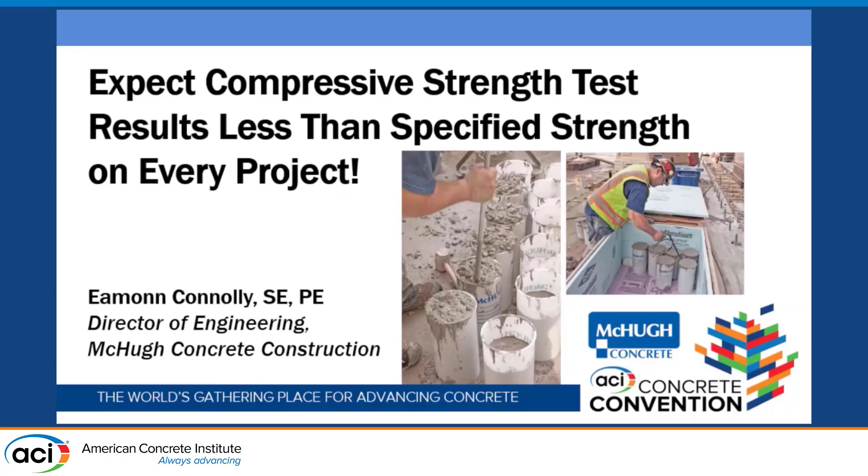What I'm talking about today is something I was privileged to collaborate on with Bruce, Colin and Jim, regarding compressive strength tests and expecting low breaks. So I'll just quickly go over this. Basic introduction: the question that comes up is, is it normal for a strength test to be less than f'c, and how often?

Per ACI 318 26.12.3.1, it's acceptable if the average of 3 consecutive tests equals or exceeds f'c, and each individual test is not less than f'c minus 500 psi, or, if the strength is greater than 5,000 psi, within 10%.

Those are the rules, but the expectation in the field is that if there's a low break, the alarm bells are ringing, the red lights are blinking, we're all in crisis mode, and the owner et cetera think the work is suspect and needs to be ripped out. And that's not true. This paper that we collaborated on is trying to point this out.

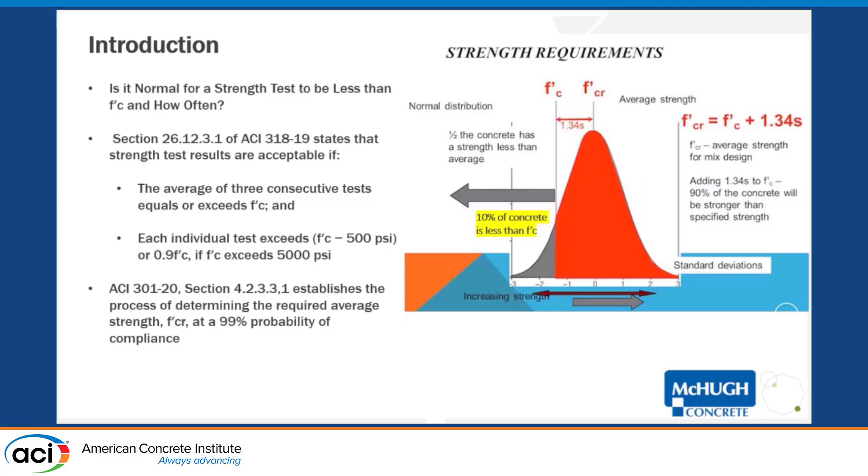In terms of designing a mix, the ready mix partner is targeting an average strength, basically defined as the target f'c plus 1.34 standard deviations. With this approach, 90% of all tests should exceed f'c, but that also means 10% would be less. So therefore, you would expect to get low breaks.

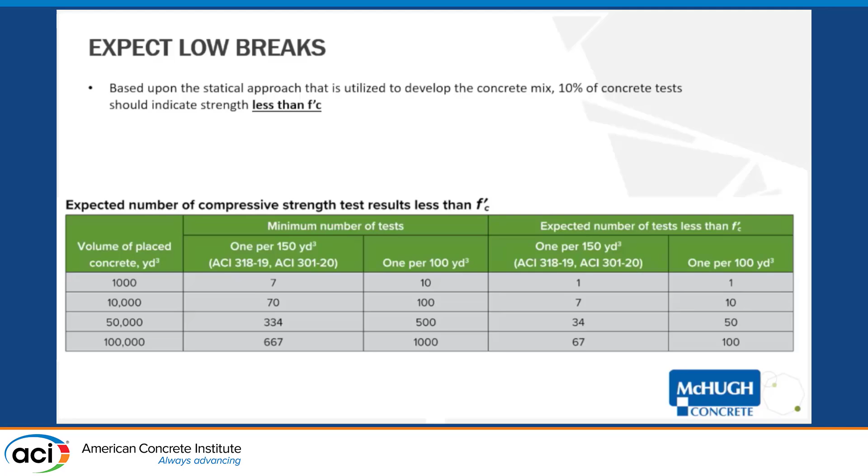For the small job, say you're doing 1 test per 150 cubic yards, you're definitely going to get one low break, again assuming the mix was designed using statistically probable methods. And if you've got a big job, 100,000 yards, you're going to get 67 low breaks. So this causes headaches, and no one wants headaches.

The ready mix suppliers, and Colin can speak to this, are some of the most screamed at people in the construction industry. There's a lot they're asked, and if things aren't going right, there are lots of phone calls back and forth. So quite often, almost standard practice, the ready mix suppliers over design their mixes to avoid the screaming phone calls.

There are obviously other parameters that could be driving the mix design, in particular issues important to the contractor in terms of set time and high early strength. But a lot of it is also just to avoid headaches with testing, and avoid being the victim of another party testing their material and suffering the consequences.

There are real costs, and there are sustainability parts to this. For instance, the ready mix supplier, to avoid headaches, throws in an extra 50 pounds of cement per yard. If we say, hypothetically, this adds an extra $15 per yard, for a 100,000 cubic yard project that's $1.5 million. It's not small money. This is about managing expectations and avoiding headaches, with extra dollars that arguably shouldn't be there. And there's also the sustainability part of it.

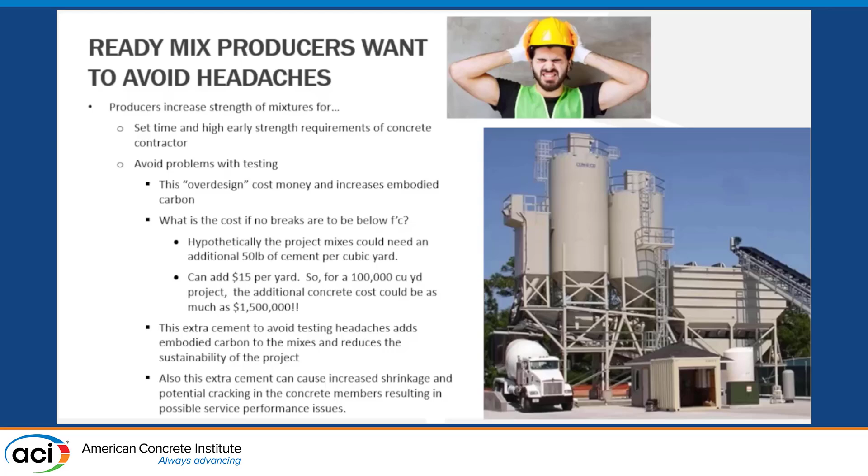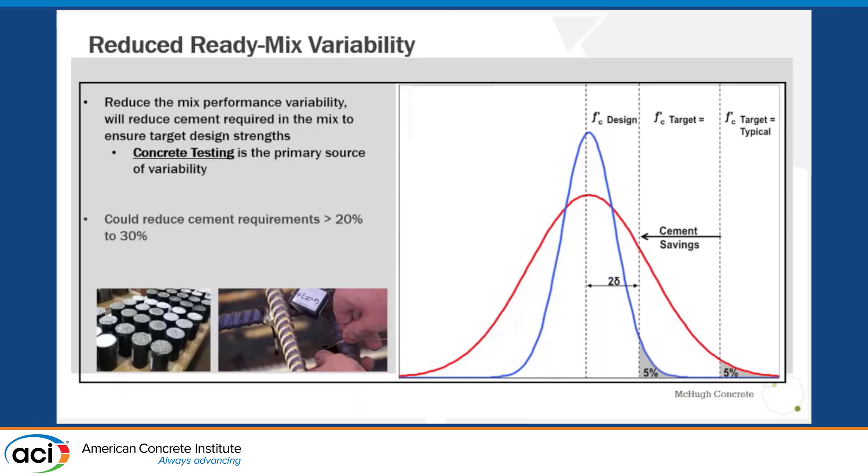And just furthering the point, the mixes are obviously shooting for a target, but the variability is coming in from the testing. If you have greater variability, you end up with this red bell curve here. So this over design results in additional cement requirements, with cost and sustainability consequences. So, testing troubles. There's a lot. There's a big long list here.

But fundamentally, it all really boils down to not strictly following the ASTM procedures. So there's a whole bunch of stuff that goes on from collecting the sample, to filling the molds, ensuring that you've got proper consolidation, ensuring that they're properly protected from the elements, and then there's the whole issue of handling and making sure that they're kept in a protected condition for that first day.

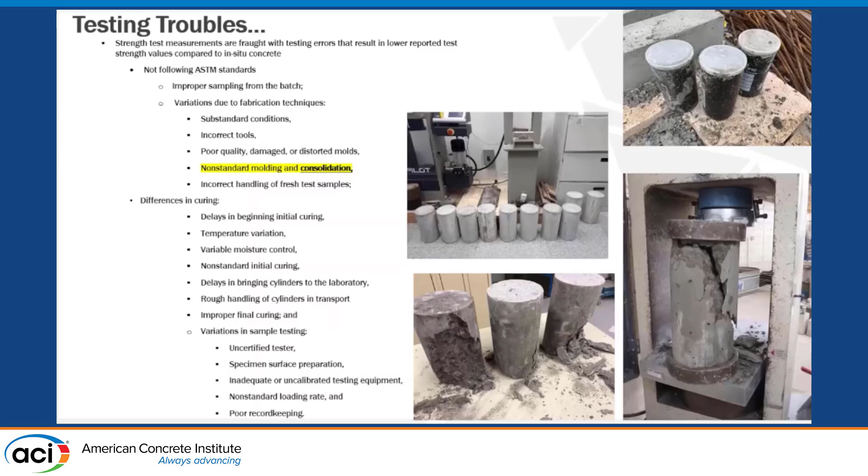Until they get picked up. They're being properly cured in the lab, and then they're properly prepared for testing in terms of grinding or capping, and then properly performing the test on calibrated equipment, et cetera. So again, there's a large number of things here, and we're all familiar with them. But all this stuff together can result in increased variability, and then we all deal with that.

And so I think perception and labeling matter, and the people who are in receipt of this report and are passing it around and discussing it are not necessarily the engineer of record or the informed contractor or the ready mix partner. So there's a wider alarm that arguably was excessive. So the language is important. It's also important to note that it's not the testing agency's role to say that this particular mix and placement was rejected. Their role is to perform their test to the ASTM standards and report the results.

Some testing agencies provide 7-day and 14-day breaks, and this was the case here. So we had 5 cylinders or specimens collected. We broke one at 7 days, one at 14 days, and then the balance at 28 days. Now the 7 and 14, that's interesting stuff. We had a 7,000 target, and we're at 5380 and 5570 at 7 and 14 days respectively. But we don't have any reserve cylinders afterwards, so we're now left in a pickle.

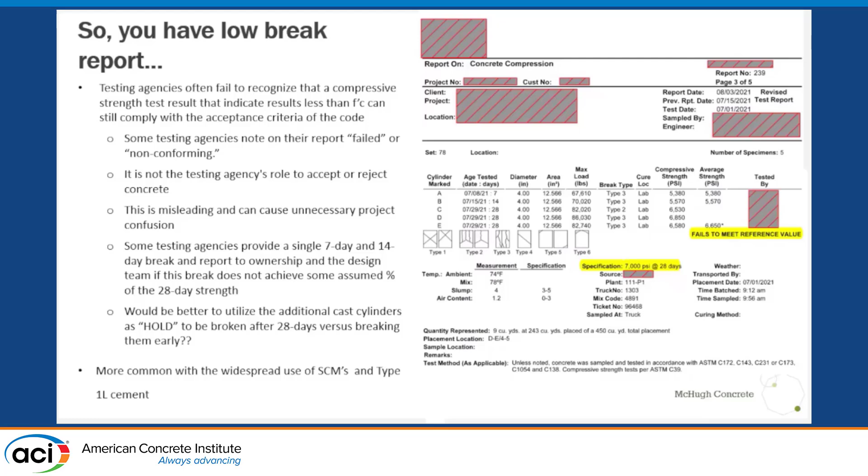And so allowing the acquisition of information to be utilized to help shape decision making, and letting the engineer of record use his or her experience or judgment to help assess whether the actual placed concrete is fit for purpose, or some other remedial measure might be required. And there's examining the testing, so looking at the test reports, any kind of information you can find out, as simple as the trucks, the frequency of trucks, the temperature, all that kind of stuff, to see what information can be gathered.

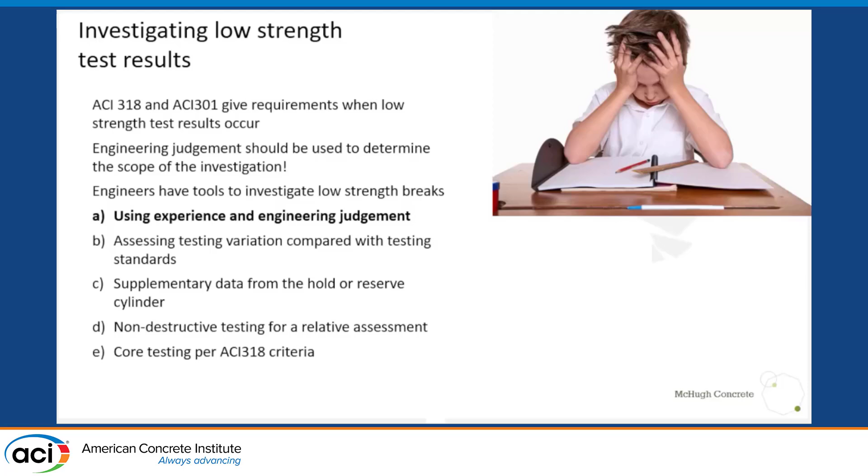Ideally getting data from the hold or reserve cylinders, which would have been taken at the same time from the same batch, same truck, and would have been really helpful to understand the results we're looking at, and then non-destructive testing for a relative assessment, and then last but not least, the worst case scenario, coring.

So engineering judgment. Like I said, it is an important concept, and it's a concept that ACI strongly advocates. The word judgment appears frequently throughout the document, 16 times in 318.

And one of the more important places in that document where it uses the term judgment is in the opening chapter, where it says the code and commentary cannot replace sound engineering knowledge, experience, and judgment. So again, the document empowers engineers to use their experience and their ability to gather information to form a judgment. And this triangle here shows you the sort of things that the engineer should be thinking about in terms of safety, functionality, and cost, as they formulate an opinion and say whether we have an issue or some sort of remediation or mitigating measures

need to be taken. It is, again, the role of the engineer of record to allow acceptance of f'c lower than specified. If, by their review of their analysis, they find a lower value acceptable based upon the reported test values, it's absolutely within their role as EOR to accept that material.

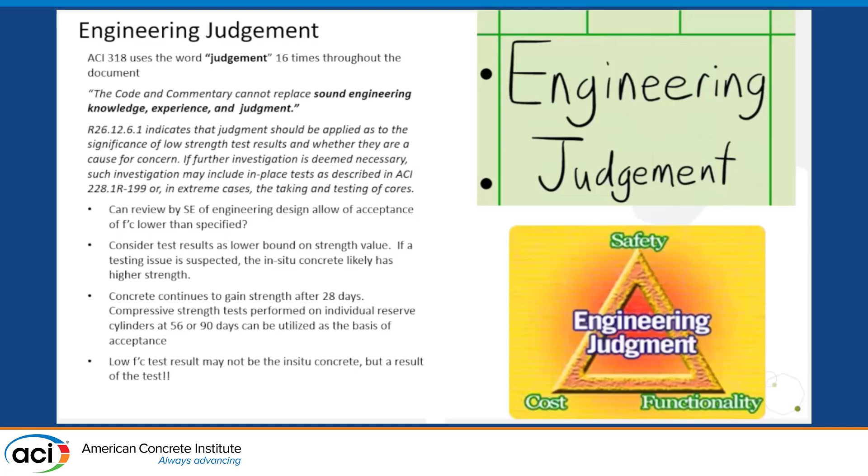And then there's also just basic knowledge, like knowing that the report represents the test that was done by a third party, and it was at a point in time, say 28 days. Arguably the concrete is absolutely gaining strength after 28 days, and those individual reserve cylinders, if they're broken at 56 and 90 days, even though they're individual cylinders, by all means they would be representative and it would be a basis for argument for acceptance. And a low f'c test does not necessarily mean that you have low strength concrete in situ. So again, you need to be able to use your deductive powers to make sure you understand what's being reported to you, and use your engineering judgment to make the best decision.

Use your test cylinders wisely. So if you're fortunate enough to have them, use them. The owner has paid the testing service to cast and to cure and to store these, and they're paying good money for this. And so, as the engineer, to not use this resource that the owner has paid money for is arguably a disservice. So this is a resource the engineer should definitely lean upon.

Even though you might have reserve cylinders and be breaking only one or two individually, and arguably it's not following the exact written word of the code in terms of 3 samples, this is where the engineering judgment comes in, saying well, these were batched in the same set. These are just at a later date. Owners, like I said, pay for them, so we should be using them.

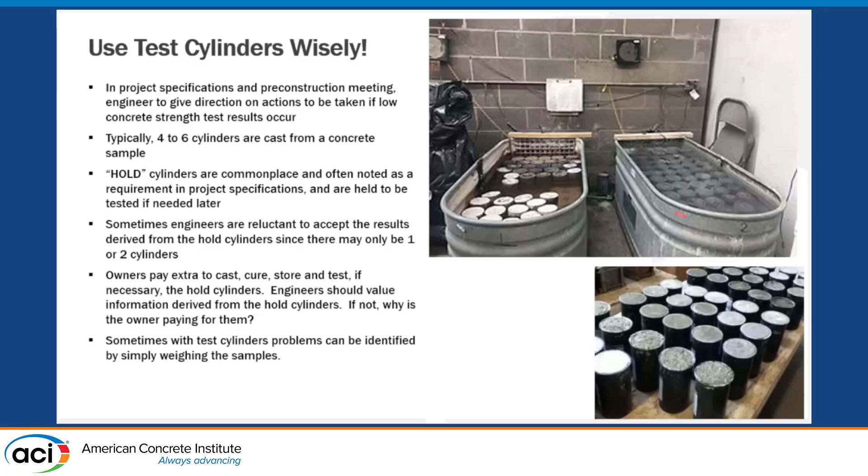And then also just using the cylinders and gathering additional information. So sometimes just weighing the cylinders would give some useful information in terms of the sample itself. Is it low density? Is there a consolidation issue? And is that then throwing up the low breaks?

Non-destructive testing options. So here are 3 really simple methods that are a useful tool to give you a qualitative feel for what's going on, and again, they do not replace a cylinder, but they would give you a feel for what's going on in situ. So you've got the Windsor probe here in the top right, you've got your Swiss hammer in the bottom right, and then you've got the pull-out test here in the bottom middle.

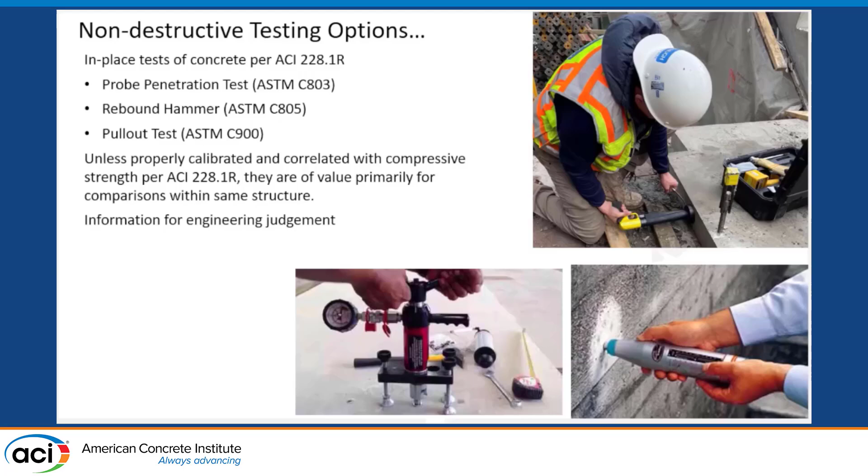If they're properly calibrated, they produce more useful information. If they're not completely calibrated, they still provide information that could be useful in a conversation in determining: is this material placed acceptable, or do we have to do something?

And then as a last resort, or in extreme cases, and the word extreme is actually in the code, it's highlighted there in the bottom, we can do some core testing. So it arguably should be the last resort. It should be performed after exhausting all other options, and is often an unnecessary expense, and quite often can lead into a whole spiral of confused conversations and hand-wringing and undue alarm. So basically, myself and my fellow authors were advocating caution in this approach.

Again, per the code, the concrete extracted by these cores is deemed to be structurally adequate if 1 and 2 are satisfied: the average of 3 cores is equal to at least 85% of f'c, and no single core is less than 75%. Just from my experience, where we've gone down this path, cores are lower, generally speaking, just by the process of sampling and the process of doing the tests, and this statement here about that 85% is very, very true.

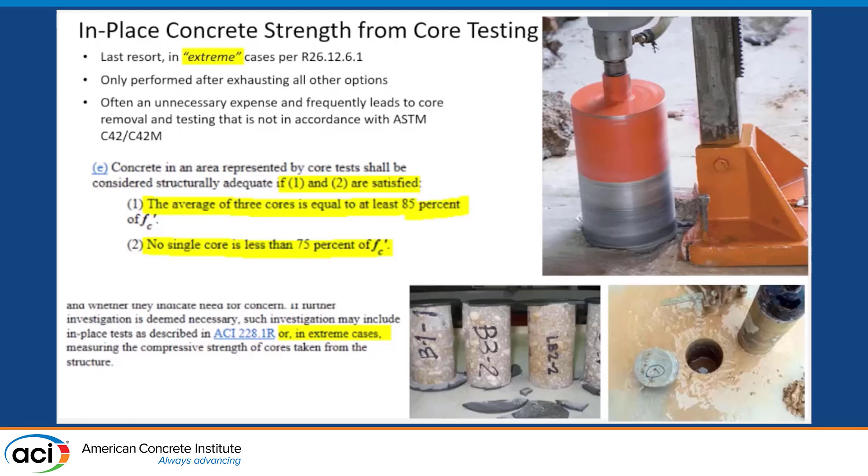So again, sometimes it is found to be a quick slam dunk, and other times, and quite often other times, it can just cause more confusion and more hand-wringing by the parties. So I guess my comment to all is basically use with caution. Beware of core removal and testing that is not in accordance with ASTM C42. A lot of the low values that come out of coring arguably come out of not strictly following the ASTM

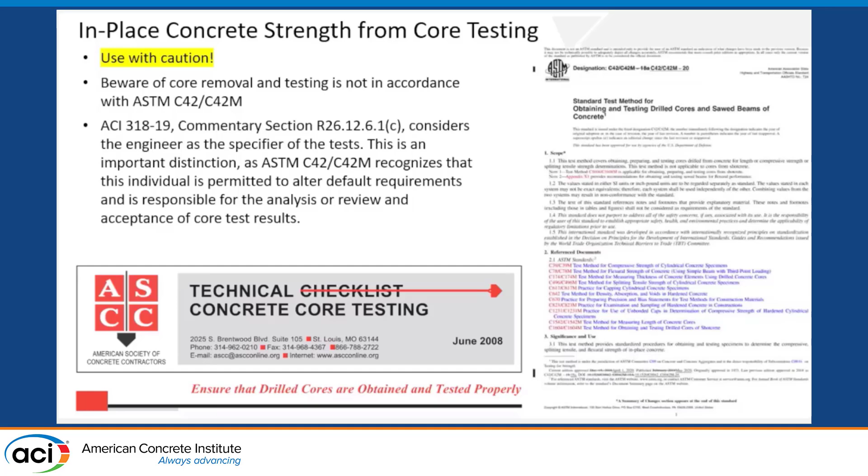procedures. So 318, 26.12.6.1C considers the engineer as a specifier of the test. This is an important distinction, as ASTM C42 recognizes that the individual is permitted to alter default requirements and is responsible for analysis review. So things become, again, a lot open for interpretation and discussion. So again, it can end up causing more discussion and more hand-wringing as opposed to being a quick resolution to an issue.

And then here's kind of a further point about this. Very important facts that are often not understood by persons writing purchase orders, evaluating strength tests, or evaluating results of in-place core concrete strength specimens is you've got category A and B. So A, the ready mix producer is responsible for the quality of the concrete that's delivered to the job site when the concrete is sampled according to ASTM C172.

Strength specimens are cast and cured as per ASTM C31. Compressive strength specimens are tested per ASTM C39. Flexural strength specimens are tested per C78, and the testing lab and the technicians are all certified. So there's a whole bunch of ASTMs there, and qualified people following strict procedures.

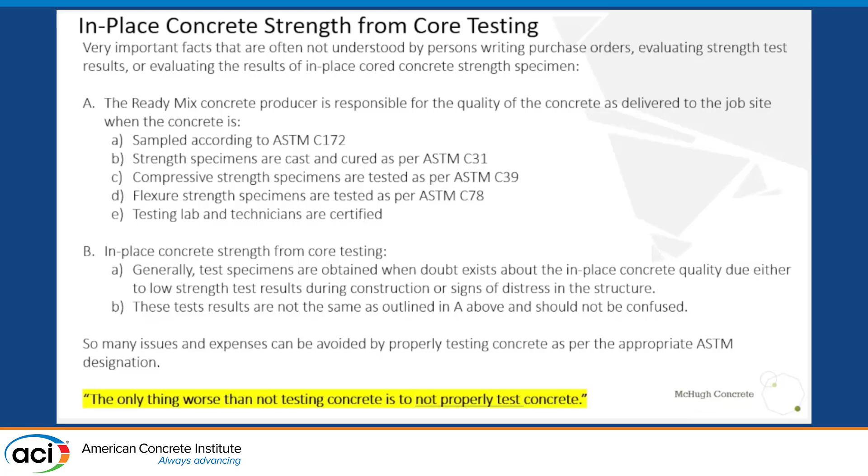The in-place concrete strength from core testing: generally test specimens are obtained when there's doubt about the in-place concrete, either due to low strength tests or possibly signs of distress. And these test results are not the same as outlined in A, and they should not be confused. So the stringent control of the sampling and the testing is not as rigorous as it is in A.

And claims, credits, and damages, oh my. So the 28-day cylinder strength should be at or above specified strength, or the owner is not getting what they paid for. This is false. If f'c were the minimum, then the code would never accept something less than f'c, as it clearly states in the code. Furthermore, below strength concrete may be sufficient and does not represent a loss or damage to the client.

This perception in the public or in the client's idea is like, well, I got something less than what I paid for, I got a damage, you owe me money, but it doesn't go the other way. It's like, well, we're the concrete contractor. We basically overshot all the mixes by 25%. I want 25% more money. It doesn't work that way.

So the owner is benefiting with a properly designed mix that is optimized with the possibility of reduced cement. There's a benefit from concrete cost, and the project has improved sustainability. So there's a benefit that the owner is getting by allowing a more optimized targeted mix design. And providing a financial credit for this issue would indeed be granting an unfair windfall to the owner. So it wouldn't be appropriate.